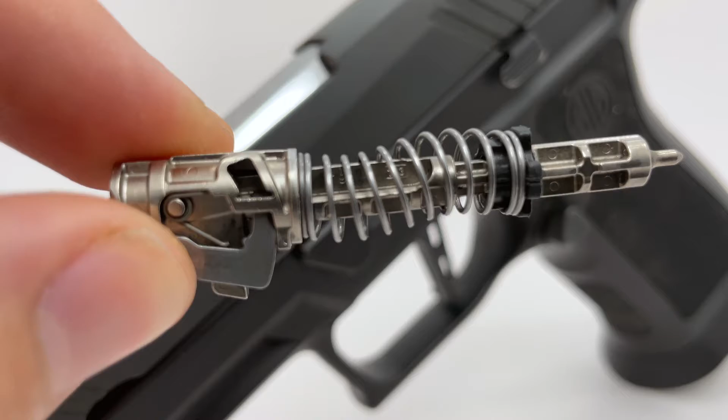In order to begin documenting this, I'm going to break down this video in a way that allows anyone to really understand not just the end result, but the mechanics behind the data. I will first explain the basic mechanics of how the P320 safety works in normal operation.

Then I will test to see whether or not adjusting the trigger's pre-travel can either fully or partially remove the internal safety. Essentially, I want to see if we can make the P320 fire, or at least be made unsafe, by simply over-adjusting your adjustable trigger.

Perhaps more importantly, if the safety can be compromised, I want to check and document how much and to what degree the safety is removed when incorrectly adjusted.

Let's begin. Okay, so over the years, the adjustable trigger for the P320 has become extremely popular, and it seems like anyone who upgrades their trigger has at some point considered an adjustable trigger as an option. Realistically, that's for good reason, because when you compare an adjustable trigger's profile to a standard trigger's profile...

Adjustable triggers in general will exponentially decrease trigger take-up, and depending on how you tune the trigger, take-up can potentially be adjusted to the point of almost non-existence.

Not only that, but when these triggers are tuned, they can also greatly improve trigger reset and essentially eliminate over-travel, which, when you add all these things together, results in substantially shortened trigger travel, which ultimately means greatly improved performance. However, when you take into consideration the design of the P320 and all of its internal mechanics...

It leaves you with the question of whether or not these triggers can inadvertently and negatively affect the operator, simply due to how the adjustable trigger is designed to make these enhancements possible via exploiting the trigger's starting position, which you will see in a minute is the reason why so many people asked the question to begin with, because the P320's mechanics heavily rely on the trigger's position to either hold or remove the striker safety at any given time.

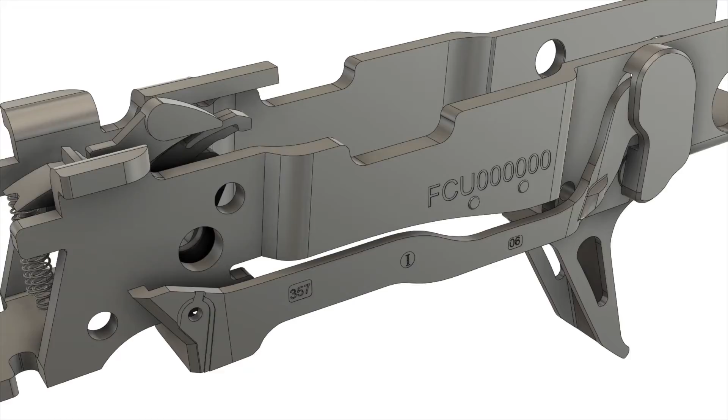The general mechanics of the P320 safety works like this. When you pull the trigger, the trigger bar moves forward and does two things. One is engage the sear and pull it down far enough to make the ledge formed on the sear drop low enough to release the striker.

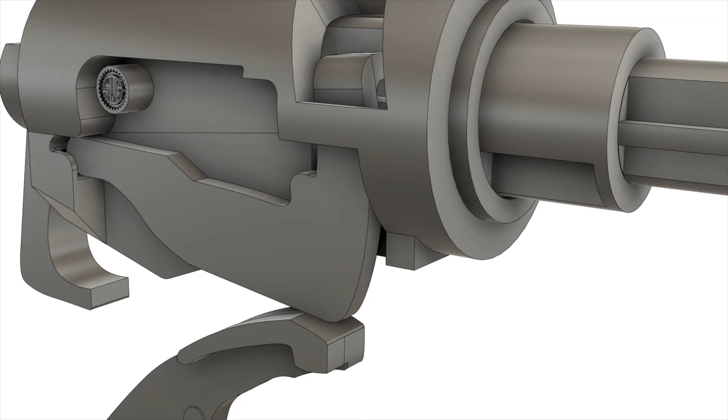The other is to engage the safety lever. As the operator pulls the trigger, the safety lever rises up and eventually engages the striker's safety lock lever. Once the lock lever is moved high enough, the P320 striker is free to move into the breech face once the trigger is pulled back far enough.

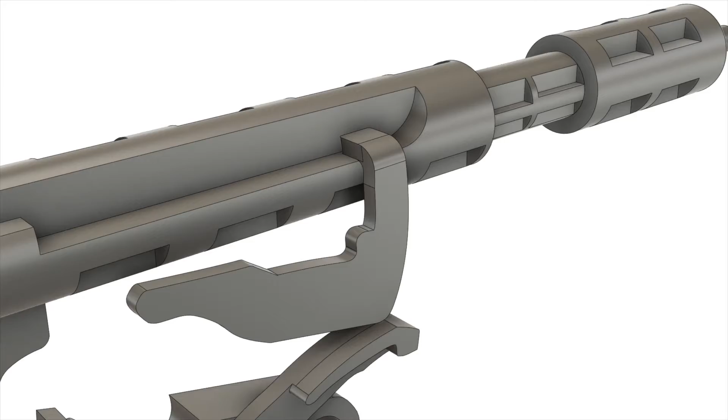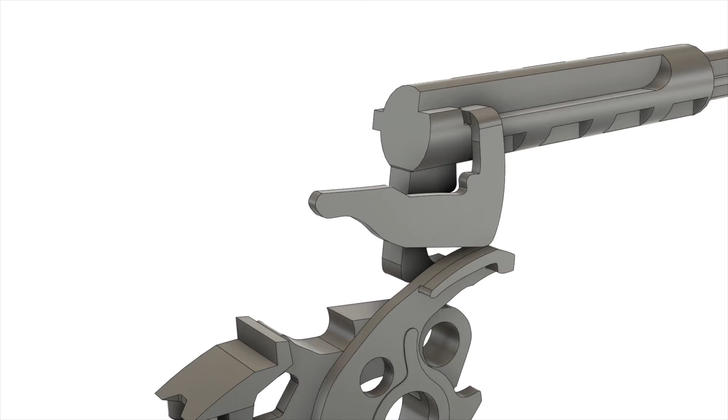The lock lever itself is this tab of metal that, when the trigger is not being pulled, will physically prevent the striker from entering the breech face. This is there for drop safety as well as to prevent outside forces from moving the sear without the trigger being pulled, or even if there is a critical failure of the striker body itself, this will help prevent the striker from moving into the breech face.

Now, it's important to understand that the lock lever can only be moved if the operator pulls the trigger so that the trigger bar can engage it.

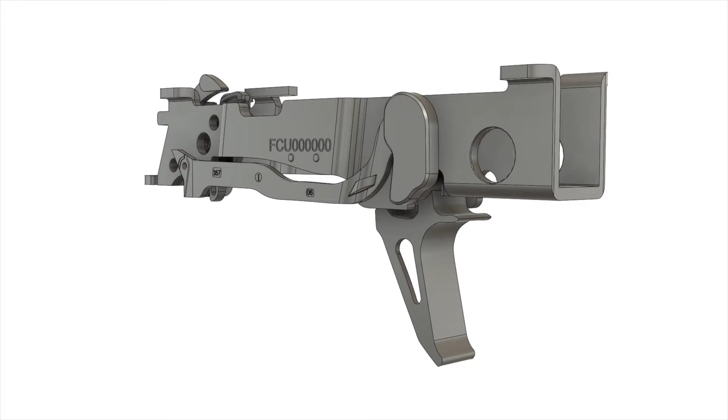Now, when you install a fully adjustable trigger and then tune that trigger, the adjustment screw will push itself off the FCU frame, at which point you are essentially causing the trigger to replicate being pulled.

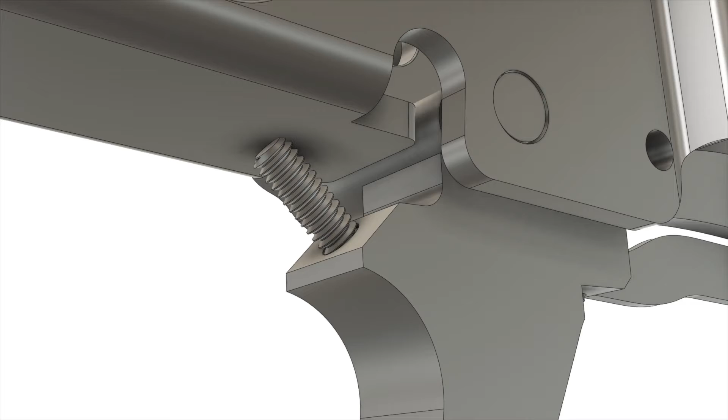The screw then prevents the trigger from returning forward, which gives the operator that feeling of the take-up no longer being there. But in reality, what's happening is the trigger take-up has been physically removed for you, as if your finger pulled that trigger.

Now, as we discussed, the striker safety is directly impacted by the position of the trigger bar, and therefore it is possible that when you tune the trigger and remove that take-up, you're also starting to engage the striker safety lock lever and remove safety in the process.

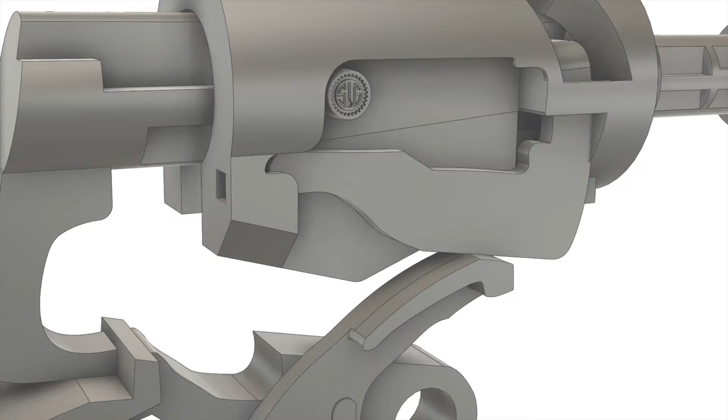Now, I will point out that when the FCU is not in the grip, you can turn the set screw all the way to the point of break.

Here I have the FCU put to the slide with no grip, and I'm just going to rack the slide and proceed to turn the pre-travel set screw with the Allen key as far as I can make it go. Eventually I can make the striker release.

But I want to be clear here, because what I just did is not really possible when the FCU is inside the grip, because when the P320 is all put together, there is a minimum and maximum you can adjust the set screws so that the P320 still remains operational.

Because if you over-tune the trigger to the degree I just did here, if you try to use the pistol now, you will not be able to either pull the trigger to break, or even if you could, you would not be able to reset the trigger after the break.

So again, just to clarify, although completely pulling the trigger to break is possible with the pre-travel adjustment screw, the reality is it will be extremely unlikely that you would ever be able to actually use the P320 in this condition.

That being said, one of the things I want to make sure to do when we start testing and tuning the trigger is to adjust the trigger to the point where the P320 is able to work, but also is tuned to the point where the take-up is almost, but maybe not entirely gone, which is what most people will do when they buy the trigger in order to get the expected performance the triggers are known for.

So going forward, when I'm testing the tuned trigger to verify whether or not it's disengaging safety, I will make sure that the trigger will break and reset on every trigger pull and after I rack the slide each time.

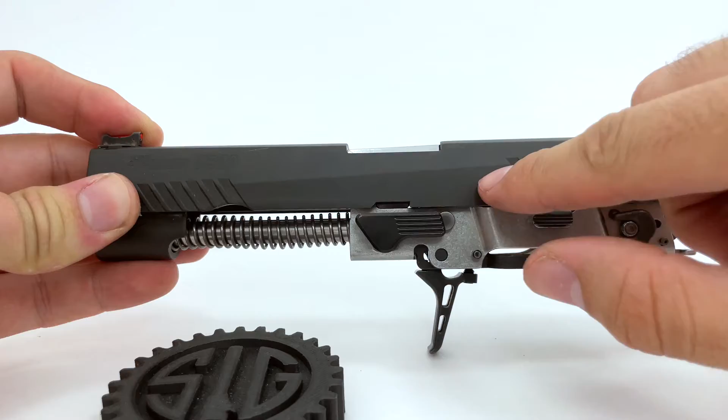Okay, so let's take a look at the testing setup. For the setup, as you've seen previously, here I have the slide and the FCU coupled together without the grip. As you can see, because the slide still has the barrel, the recoil assembly, and the takedown lever in place, if we look at the rear of the slide, the FCU is naturally aligned to the slide like in normal operation.

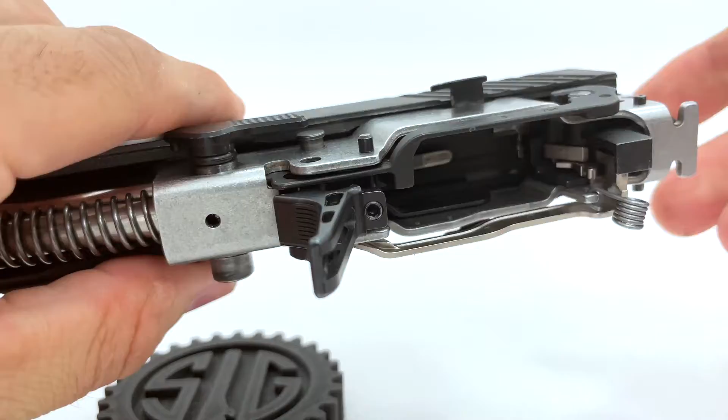Now for the test, what I'm going to do is mount this P320 assembly to a vise to keep it in view as I'm working. So now if I zoom in, you can see the mechanical function of the P320 very clearly.

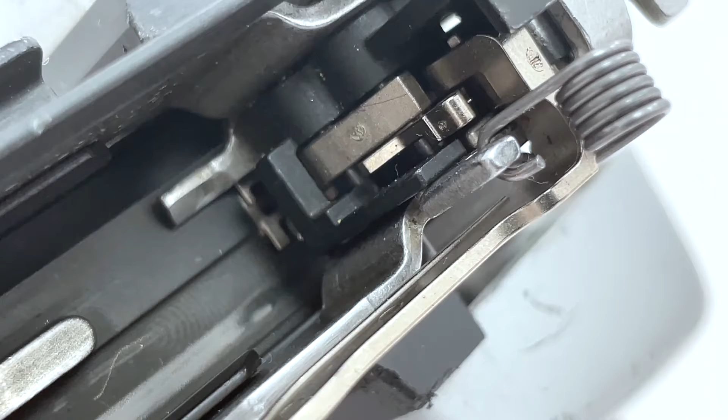So the trigger bar is right over here and it sits just behind the sear's leg here. Right next to it is the safety lever, which is also situated just in front of the trigger bar. So if I pull the trigger, you can see the trigger bar moves forward and interacts with both the sear and the safety lever almost instantly after moving it.

So if I pull the trigger further, the striker releases, and now I can even hold down the trigger while racking the slide, and we can actually see the reset of the trigger bar as well.

So here is the trigger bar and below it is the sear's leg. If I just ease off, the trigger bar falls and resets behind the sear's leg again. I'm showing you this so that you can see that the assembly is truly a fully functional setup.

So you know the results of the upcoming test are related to the actual, true mechanical assembly, and the only thing really we're missing is the grip.

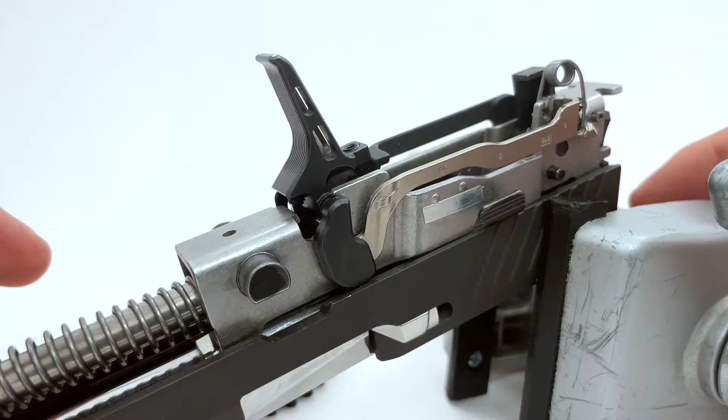Now I want to draw your attention to the bottom right of this assembly. This metal piece is the striker lock lever, and right above it, which I'm moving back and forth, is the safety lever.

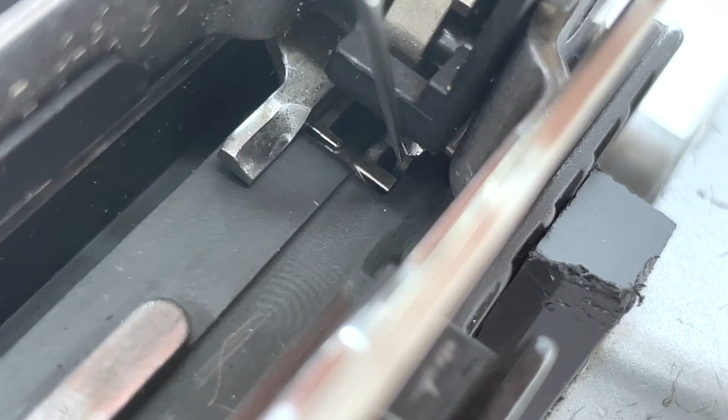Now watch as I pull the trigger. The trigger bar begins to move the safety, and if I keep pulling the trigger, it further pushes up on the lock lever. Then inside the P320, the safety is being removed so that once I pull the trigger far back enough, we hear the striker release.

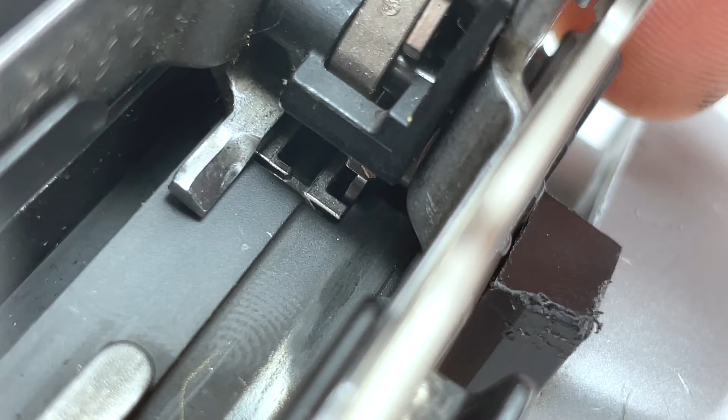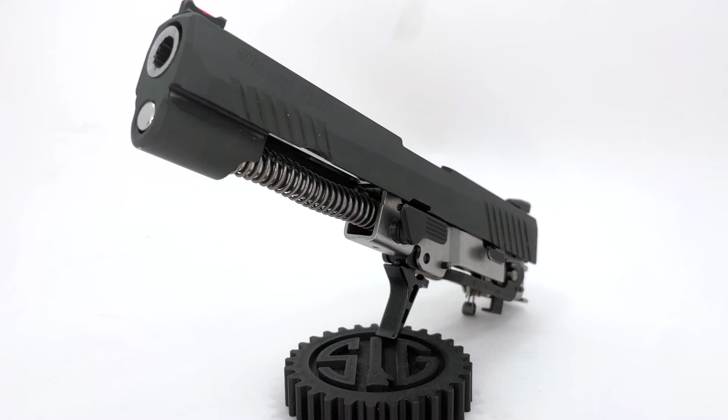Okay, so let's start documenting this test. The first thing I want to do is establish the baseline resting position of the striker safety lock lever when the P320 is configured like a factory model, so the set screws are in no way affecting the trigger positioning.

Before I start, I also want to quickly note the gap between the trigger bar and the sear right over here so that you can compare this after we tune the trigger.

Now, the way I'm going to document the resting position of the safety is by using this carbide tip scriber to physically and permanently scratch the metal surface of the lock lever right where it becomes visible off the body of the slide.

Okay, so once again, this line now represents the safety in its normal resting position before the trigger is even touched or tuned.

Next, I want to document the tuned trigger position. To do that, I'm going to make adjustments to the trigger using the Allen key so that we can properly replicate what the average person will do when they install this type of trigger, which is to attempt to remove almost all the take-up.

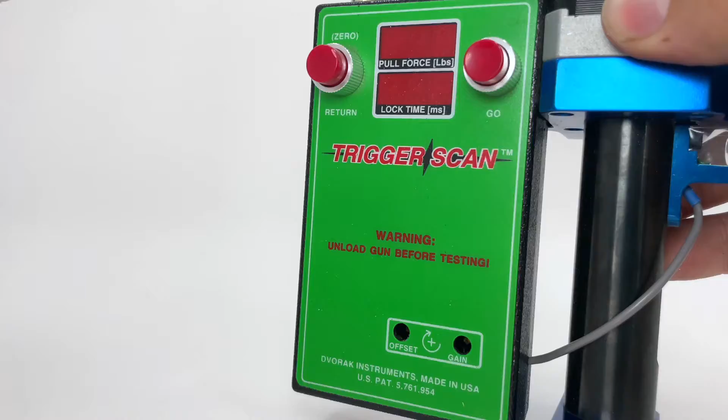Now, the problem when tuning a trigger is that it's going to be virtually impossible for you to know exactly how you are affecting the internal safety when you're turning the set screw, unless you have some sort of extremely accurate testing equipment like this trigger scan device, which would help you verify what you did.

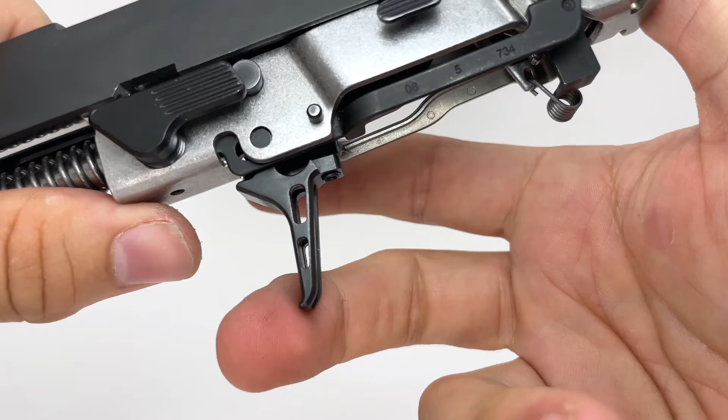So on average, most people will do some trial and error testing to tune the screw until they have just enough pre-travel to allow the trigger to work, because if you over adjust the set screw, you could potentially make it so the trigger might release the striker but then won't reset properly, or you simply get a dead trigger.

So generally when installing these triggers, you need to do some trial and error to get it to the sweet spot, where the trigger works consistently but also has the shortest trigger travel. So I'm going to tune this trigger now to that level and document the tuned position of the safety.

Okay, so here we have the tuned trigger, and as you can see, when I pull the trigger, the striker releases, and when I rack the slide while holding down the trigger, it will also reset. At a glance, you can also see that there's very little pre-travel at this point.

And if we look at the internals of the FCU, you can see that the trigger bar and the sear are pretty much in contact with one another, with maybe just a fraction of a gap between them. Whereas if you recall from before, there used to be much more of a gap here.

And so now that we know the trigger works, I'm going to use my carbide scribe to mark the lock lever once again. This line is now representative of the position of the lock lever when the trigger is tuned and the P320 is still fully functional.

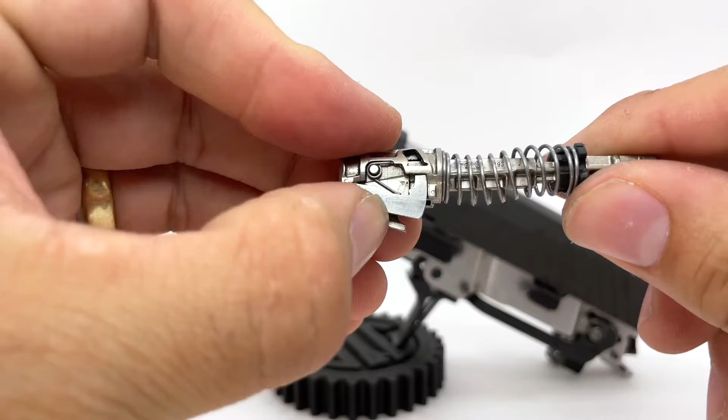Now, also as a reference, we need to document the distance the lock lever travels to when the P320 actually discharges, because by the time you pull your trigger enough to discharge, the safety lever will not only have removed all the safety from the lock lever, but it would have continued to raise the lock lever way past the height needed to disengage it.

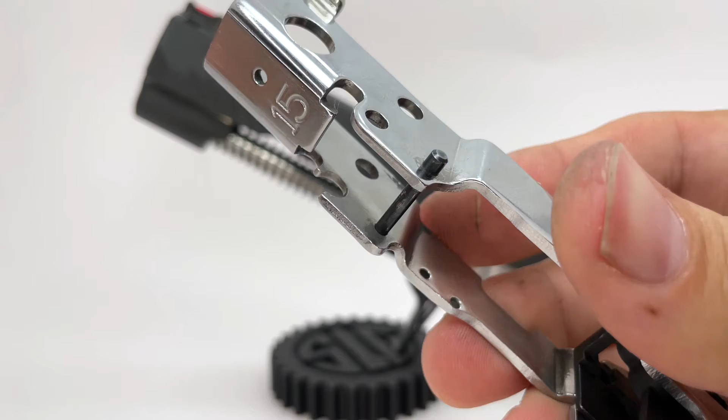Because essentially the lock lever and the safety lever will continue to move up until the trigger hits the trigger stop pin on the FCU. I'm doing this so you can see where the lock lever ends up moving to at the exact point during a trigger pull.

So with the P320 reset, I'm going to begin turning the set screw continuously and stop at the exact distance the trigger travels to the instant the striker releases.

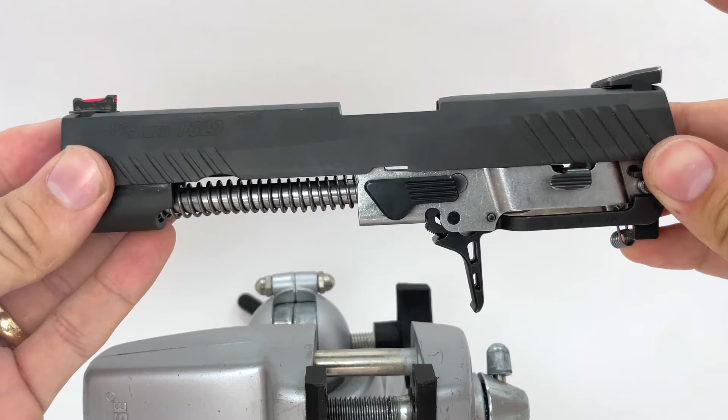So there's the striker releasing, and now I'm just going to use the carbide scribe to mark the lock lever again and note the distance it moved at the time of break. All right, so the last thing we need to do is verify the exact distance the lock lever needs to move in order to reach what I call the safety delete point, which is the absolute minimum distance the lock lever needs to move.

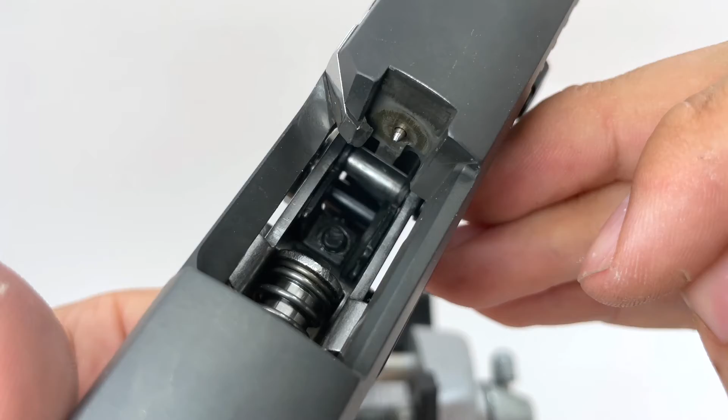So that it can no longer physically prevent the striker from moving into the breech face. To do that, I'm simply going to use the same setup we already had for testing, except now I have removed the main spring and the reset spring from inside the striker housing, but I have left the lock lever spring in place so that the only thing preventing the striker from falling into the breech face is the lock lever tab itself.

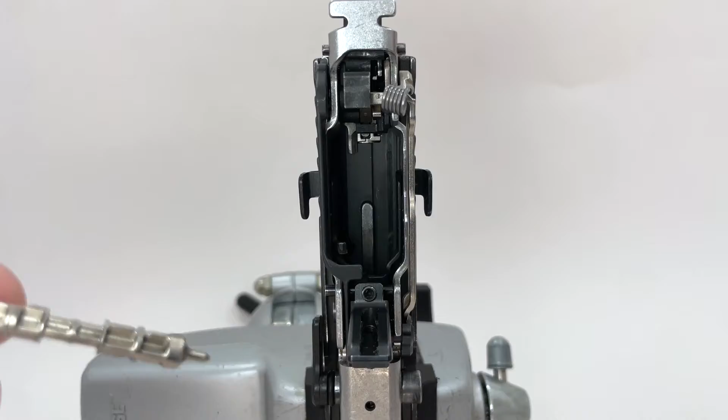In this setup, I'm also going to be mounting the slide assembly vertically so that when the safety lever has pushed the lock lever sufficiently to disengage striker safety, the striker will fall by gravity. I've also removed the barrel from the P320, and I did this in order to allow you to see and verify that the striker has moved its way into the breech face in the next test.

So now I will turn the set screw with the Allen key until the striker free falls into the breech face, and the set screw thread is what's going to give us an extremely controlled way of pulling the trigger so that we can have an accurate end result.

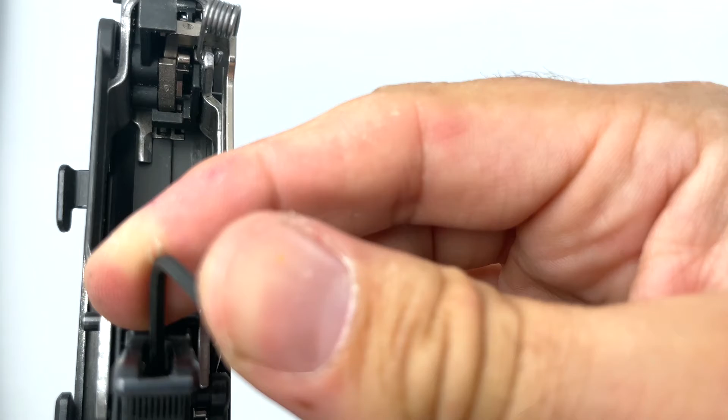And I hope the microphone caught that noise. That was the striker falling. Let's just take a look at the breech face now. And here you can see the striker is protruding into it.

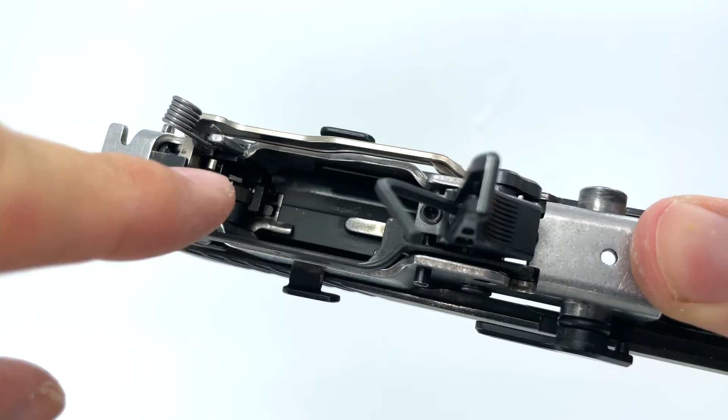And so now I will mark the lock lever for the last time with the carbide scribe and note the distance that the lock lever moves to at the point the safety has been entirely removed.

Okay, so now we have all the information we need to form a proper conclusion. We capture the starting or resting point of the lock lever, and we can call that the minimum distance of travel. We capture the distance the lock lever moves to at break, and we can call that the maximum distance of travel. We capture the distance the lock lever travels to when the trigger is tuned, and we can call that our adjusted distance of travel.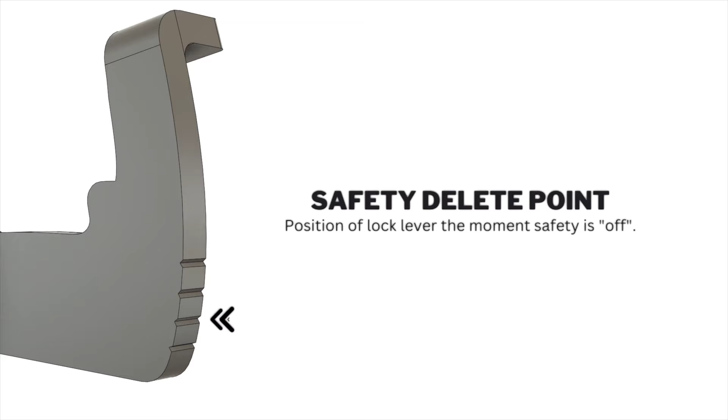And last, we capture the distance the lock lever needs to move to in order for the safety to be removed, and we can call that the safety delete point. And so now with that context, here you can clearly see that the safety was greatly impacted by the fact that the trigger was adjusted.

But I'm not just going to stop here, because I want to quantify this further by measuring these distances to come up with a percentage of safety lost when the adjustable trigger is installed and tuned.

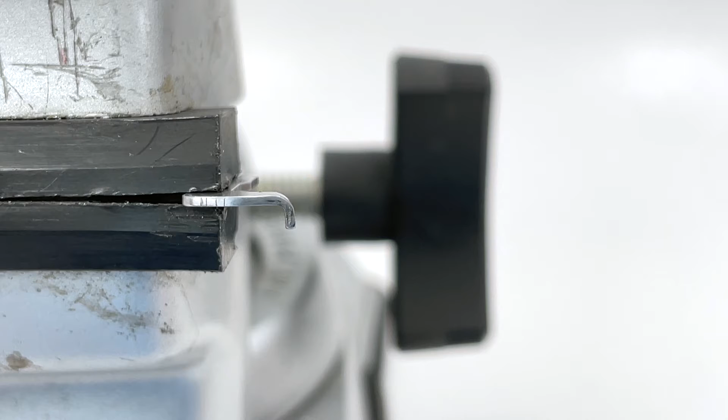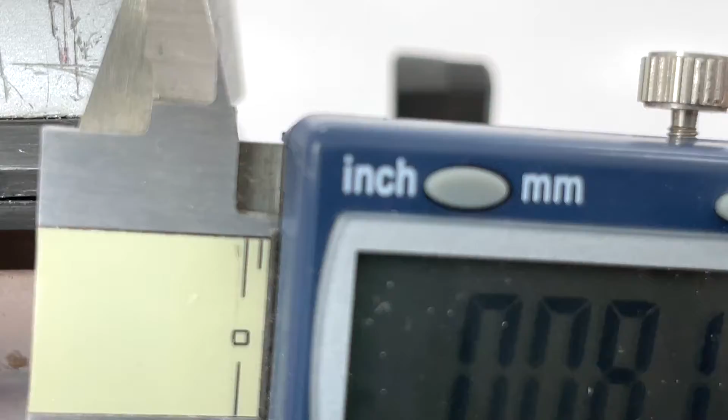So to start, we need to measure the notches made on the lock lever, and to do that I will use my calipers here. And so between the minimum and maximum distance of travel, we have a total of approximately 0.08 inches.

And now between the minimum distance of travel and the adjusted distance of travel, we get something approximate to 0.03 inches. Now let's get the measurement between the minimum distance of travel to the safety delete point, which seems to be around 0.06 inches.

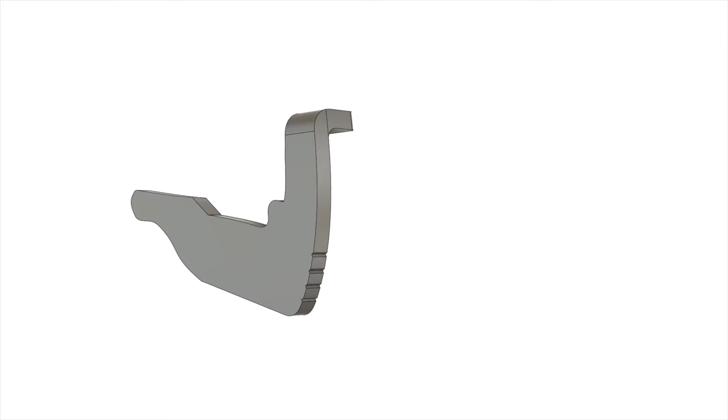Okay, so let's take these numbers and calculate the percentage of safety lost when tuning a trigger. Here is the lock lever once again, and from the minimum to max we determined is 0.08 inches, but that's just a reference. The important numbers are actually these. The minimum distance of travel, or the resting point, which we are saying is 0.00 inches, the distance from the minimum to the safety delete, which was 0.06 inches, and the distance from the minimum to the adjusted distance of travel, which was 0.03 inches.

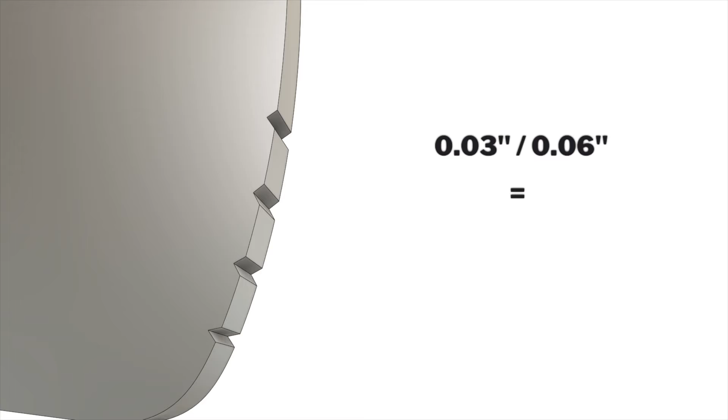And therefore the amount of safety removed is equal to 0.03 divided by 0.06, meaning that once the trigger is adjusted, you are losing approximately 50% of the internal striker safety, and that's assuming you don't overtune the trigger in a way that allows the safety to be further reduced.

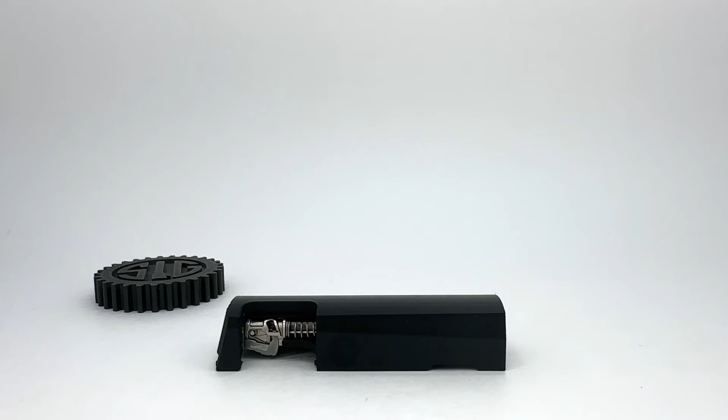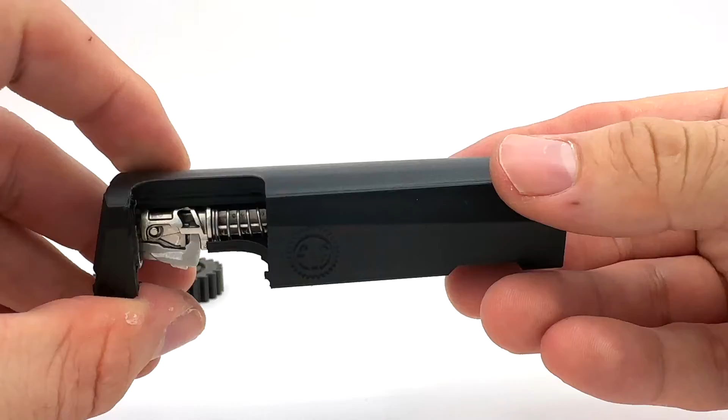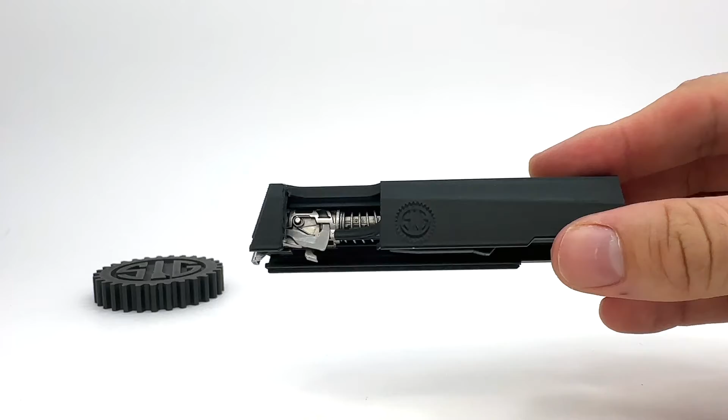Now, in order to further drive my point home and provide subscribers with further evidence of what I've just shown you, I've gone ahead and 3D printed this OEM slide, with a couple modifications to enhance your visibility. I removed the extractor spring at the back since we don't need it for this, and I chopped off the front end of the slide due to the limitations of my 3D printer size. Last, I made a large window on the side of the slide, giving us a complete and unobstructed view of the striker and internal safety mechanisms inside. So now I can take a complete FCU assembly and mount it to the slide.

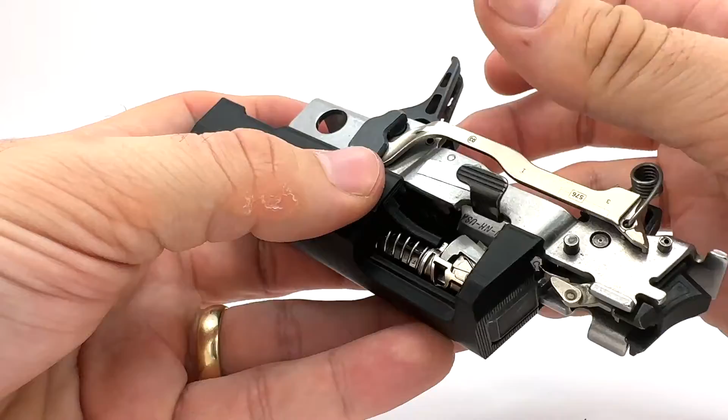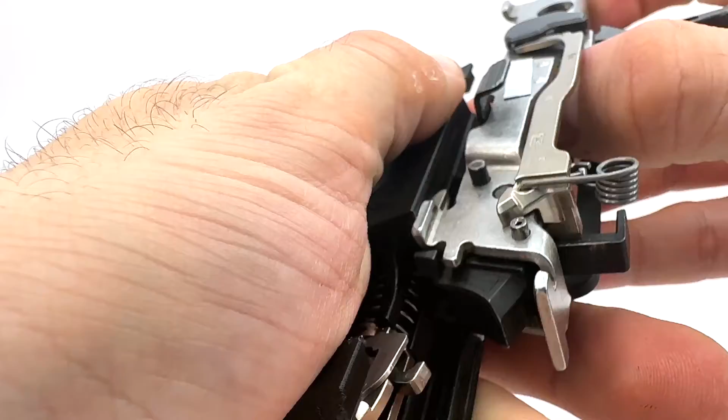Like that. And of course, the striker is not engaged to the sear yet, so it is loose. But if I rack the slide, you can see that the striker mainspring is now compressed all the way back. Because of that, I also need to manually hold down the slide in the FCU so it won't spring forward on us, and this all remains in battery as I work.

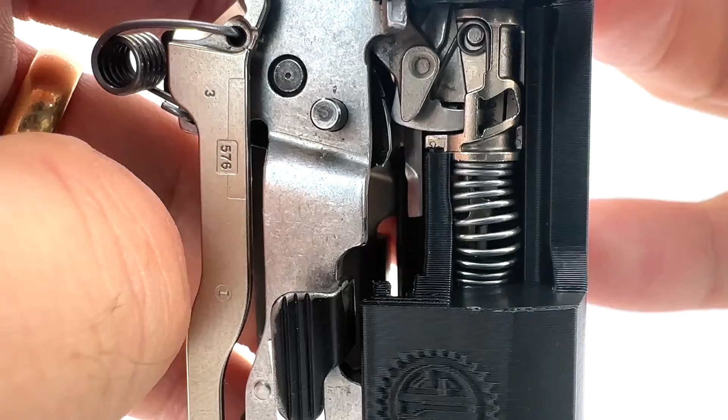Now that I have this assembled, I want to show you a few things. First, the set screw is not engaged to the FCU body, so the trigger is in no way engaged at this time. Second, there is a very small, almost insignificant distance between the lock lever and the safety lever. I'm going to zoom in so you can see what I'm talking about on camera. The two parts are almost but not really touching at this point. So again, the trigger is not engaged, and this is currently the distance between the two parts.

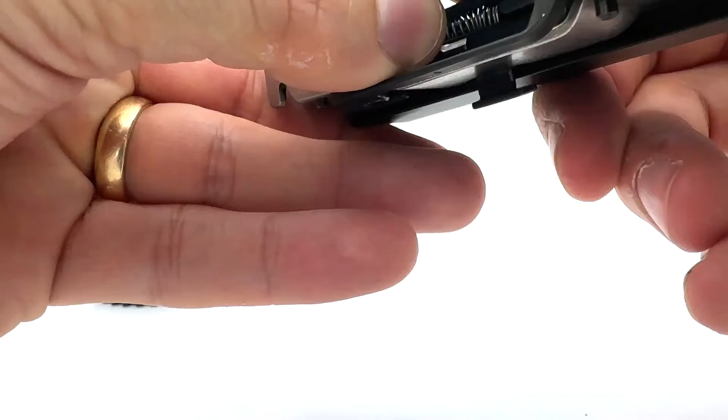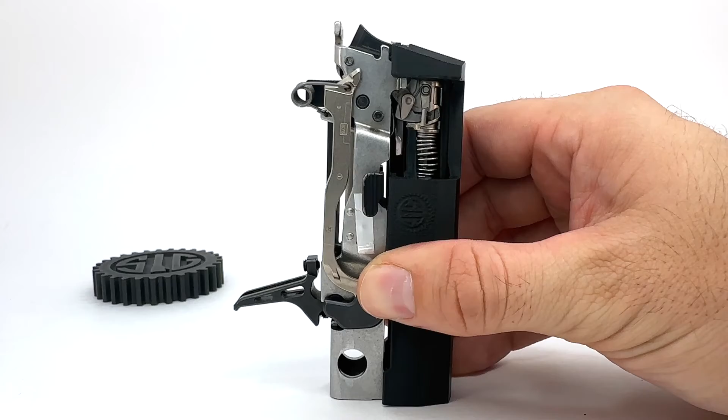Now if we look underneath the FCU, we can see the gap between the trigger bar and the sear. Here is where things get interesting and potentially dangerous. To show you what I mean, I'm going to start turning the set screw until we can physically see the lock tab begin to rise. Right there, the set screw made contact with the FCU frame, which means any further turns will now start to engage the trigger itself.

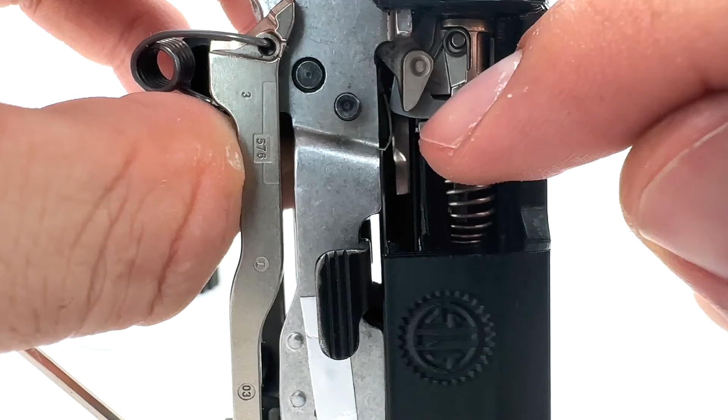So we just want to keep turning this until we get the safety lever to make contact with the lock lever, right there. That was about a half turn of the Allen key, and we already made contact with the striker lock lever, but we haven't started to disengage it yet. Let's do that now, and I'll keep turning the Allen key. Right there, with maybe a quarter turn or less, you can see the lock lever was engaged. We've ever so slightly moved it upward, which means we have already begun to remove the internal safety off the striker.

Let's take a quick look under the FCU now. Right there, you can see that even though we're just beginning to disengage the safety, we're not even close to completing that gap between the trigger bar and the sear. Because if you recall, most people, when they tune the trigger, do it to the point where there's barely even a gap between the trigger bar and the sear. So let's complete the tuning process so that the trigger bar just barely meets the sear edge.

Right about there. Now I want to bring your attention to this window on the striker's housing, where we can see that the lever is significantly raised up. What we're looking at now is give or take a 50% loss of internal safety on this P320. Of course, it's hard to tell just by looking at this all stationary here, so as a reference, I'm going to show you the action by rocking the FCU back and forth so the safety lever will engage and disengage the lock tab while the set screw holds down the trigger position.

You have to understand that this small tab of metal is only approximately 0.03 inches thick, so it's not much surface area to start with. Clearly by this point, whatever protection that tab on the lock lever provided you is pretty much gone. Also remember that by the time the P320 discharges, that tab has already been completely removed out of the way.

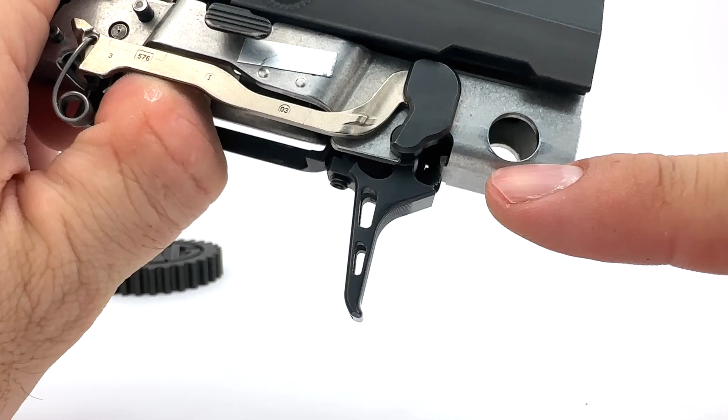As anyone in this community knows, one of the most important rules of firearm safety is to never put your finger on the trigger unless you're ready to discharge, and that includes just resting your finger on top of it. But in this case, you've gone beyond that. This is the equivalent of not just resting your finger on the trigger — you've essentially been walking around with the trigger permanently pressed, mechanically and actively disengaging the safety.

That's something I urge subscribers to consider strongly when you are tuning your P320. Now, I do want to make clear that at this point, if you haven't tuned the trigger to the point where the sear is starting to move, like we did here, where the trigger bar is only just behind the sear leg but not pushing on it yet, you haven't technically begun the process of firing the P320.

Now, if it's possible to have the trigger tuned to the point where the sear is even slightly being engaged but still remains operational, that's not something I have tested for here, but I can presume it is plausible based on what I've seen and based on the fact that trigger tuning is not a science where the average person would know the absolute distance they've made that trigger travel while tuning the gun. However, this isn't something I've tested for, and I don't want to make claims without any of the data on hand. So as far as what I do know for sure, the internal safety is being compromised, but I do not know yet if the sear has also been compromised.

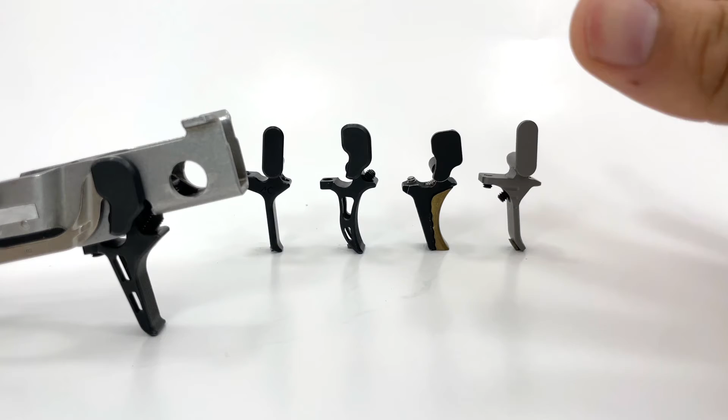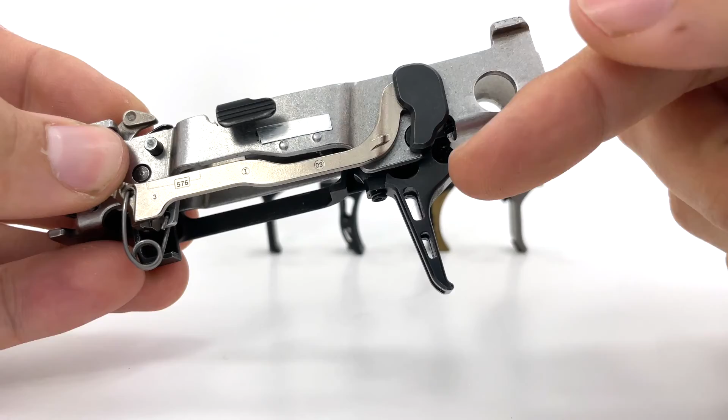In conclusion, there is no doubt that the current design of fully adjustable triggers, specifically those with pre-travel adjustments, will at least partially disengage your P320's internal safety should you unintentionally tune the trigger too much. Now, the problem is that 'too much' is fairly subjective. From what I can tell, any adjustment that can in some way affect the distance of trigger travel, no matter how slight, is going to start the process of safety deletion. So within the community of firearms and firearm safety, even a 1% loss of internal safety could be considered a hugely debatable compromise for some people.

Now, I will note that adjustable triggers have been used in P320s for quite some time, and no one has ever really pinpointed that a tuned trigger has been the cause of things like negligent discharges. But the results here do paint a picture that even if they're not directly responsible, they definitely have the potential to play a part in some of those issues.

Now, the good news is that if you're after a particular look, or if you just like the ergonomics of any particular adjustable trigger, you can still use those triggers. But from the point of safety, you will want to retract the set screw and make sure to include pre-travel in the overall trigger travel.

Now, if you've been following the channel for some time, you know that I like to design, create, and overall just find solutions to problems. Since I discovered this finding a couple months back, I have been working on a potential solution, which, although promising, I'm still testing heavily before I share it with the community. But basically, it will allow you to continue to use the adjustable trigger of your choice while also remedying the safety loss issue I found here. So stay tuned for that.